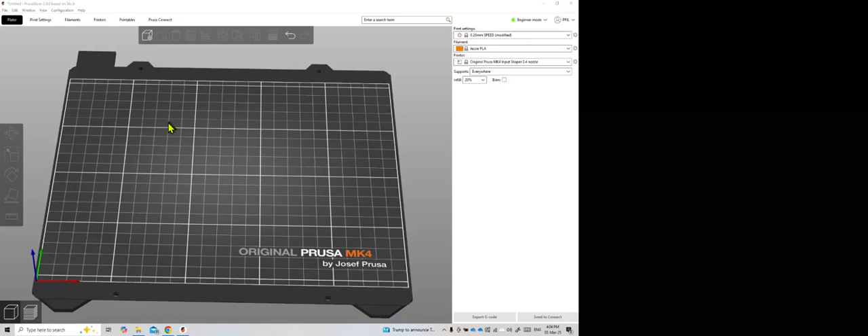So this is the plate. Right now it's set up for the MK4, and we see that under our printer options. This is the MK4 Input Shaper. We're using the Jessie PLA, so if you're not using the Jessie PLA, you want to put the Jessie PLA in there. And we're going to keep the speed the same.

You can change the infill between 15 to 25%. I'm just going to keep it at 20%, and we're going to turn supports on everywhere, just in case.

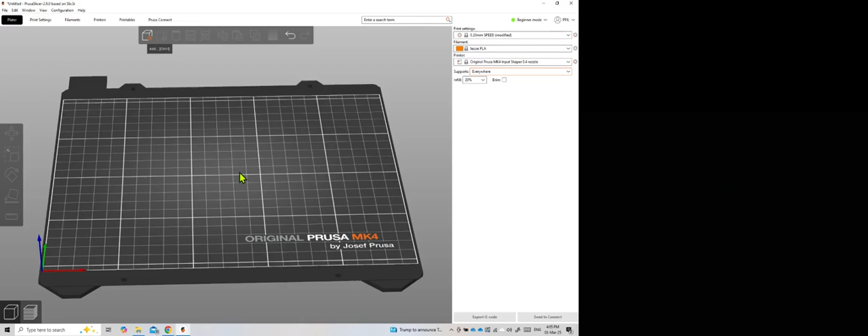And then the first thing we're going to do is click on Add, and we're going to find our STL file and bring it in. And there we have our coin.

All right, so the only thing we really want to do with this coin is confirm its scale, make sure the sizing is about right. We are looking at it in inches. There's nothing really too special about this coin the way it is, so realistically that's all we have to do.

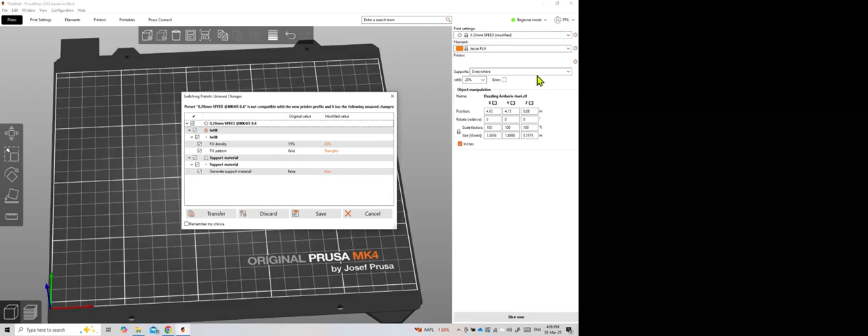I'm going to go ahead and move this off to the side here, and we're going to slice. So again, make sure that you've got the MK4. If you are using the smaller Mini, make sure we can use the Mini settings. Otherwise, you can use the MK4, Jessie PLA, 0.2 millimeter speed, supports everywhere, infill at 20%, and we're going to hit slice now.

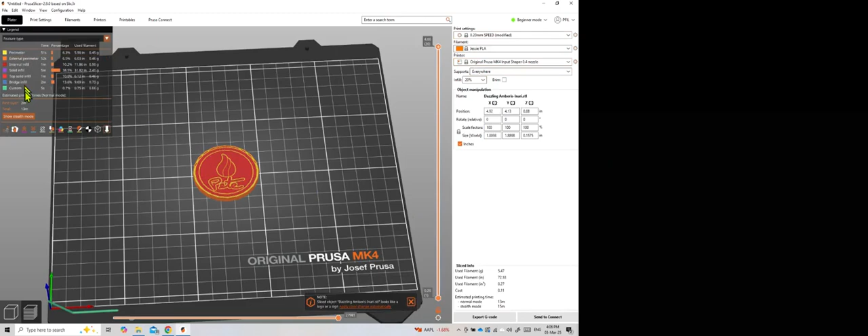Okay, so now we've got our information. We can see all the different colored layers, and you can check the different layers and see kind of how things are going to be printed, as well as the nozzle movement, how the nozzle is going to be moving for each layer.

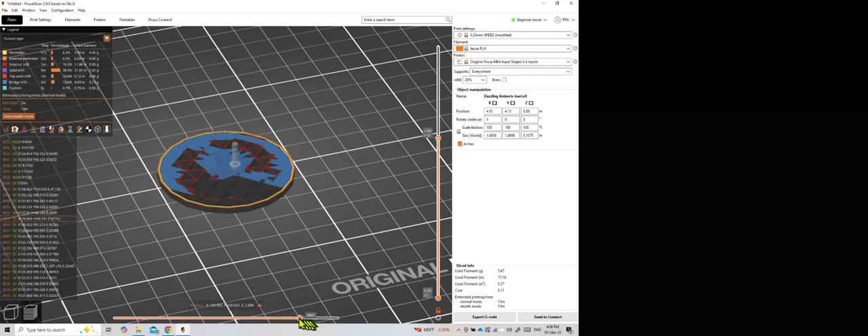So that was the top layer. If I move this somewhere into the middle, then this is going to be the nozzle movement for that particular layer. So it's a pretty neat thing to see.

All right, once you have everything squared away, we don't really have any supports, so we're good to go. We'll notice down on the bottom we have approximately 5.5 grams of used filament, about 0.27 cubic inches, and a cost of about 11 cents, 13 minutes of normal time to print this from start to finish.

And we're going to click on Export G-Code, and that is going to allow us to save as a G-code file and save this code so that we can download it to a USB stick that we can then insert into the 3D printer.

If by chance you do have a phone or tablet or something connected to a Prusa printer over the internet, then you can send to Connect. Remember, here's the Prusa Connect, and then you can control your printer from the internet with this print file.

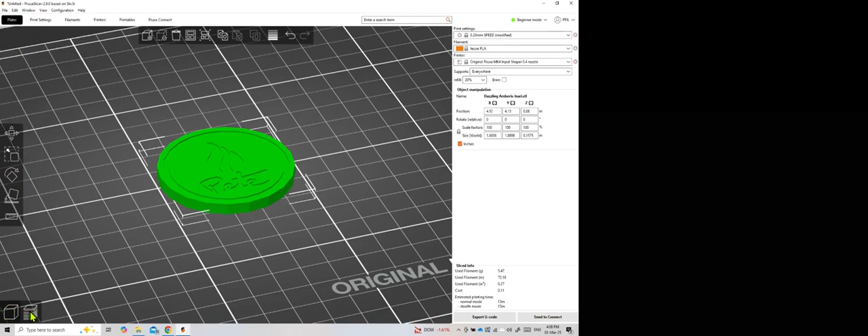Okay, if you don't like what you see and you want to make some changes, you can go ahead and click on to the editor view, and you can make changes as necessary. Maybe you move, rotate, or scale. If you think you're okay, then you can just click on this other window, and that will bring you back to this view here.

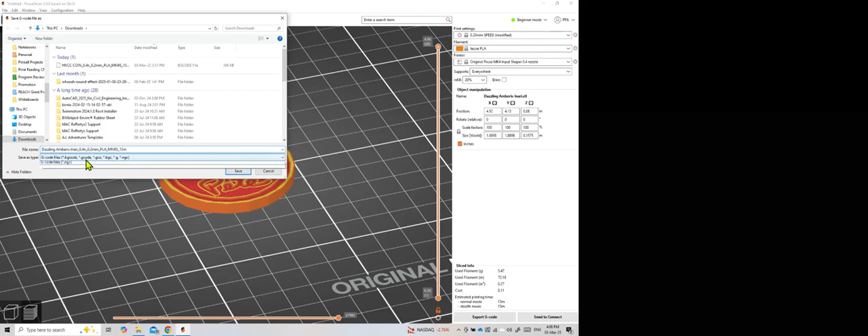That's all there is to it. Hit Export G-Code. In my Downloads folder, that's fine. You can rename it if you'd like to. Save as type, so it's going to save it as the appropriate G-code file type. There are specific ones if you want to, or you can just keep it generic and hit save.

It'll make sure that you are in the latest firmware, so click OK and you're all right. And that's really it. Thanks for tuning in. If you need help, reach out to me.